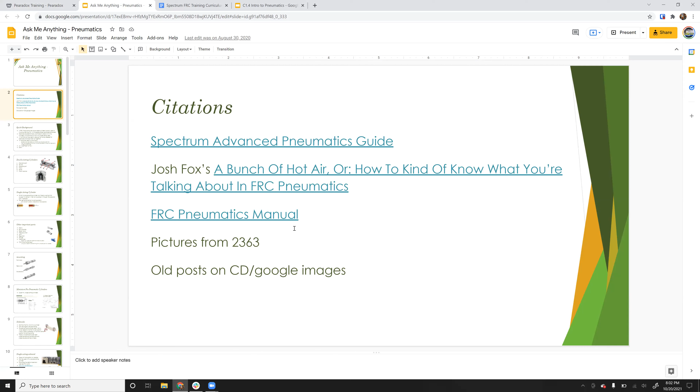This is the Ask Me Anything About Pneumatics from our training guide, our training page on our website. There's some links to some other things in here that might be useful if you want to dive into it a little bit more.

I want to make sure everybody has an idea of what pneumatics are. In FIRST Robotics, pneumatics are air-powered cylinders, typically used to move something into one of two possible states. We'll refer to the pneumatic system as being extended or retracted, typically. There are solenoids that are electronically controlled to direct the air cylinders. The cylinder is the thing people will refer to as a piston, but it's really a cylinder with a rod. It's not really a piston.

The solenoids are used to control the airflow within the cylinders. There's a thing called a manifold that hopefully I'll have a picture of later I can point out. A manifold is a piece of hardware that can reduce the amount of tubing needed to go between solenoids and all of that.

Air tanks are used to hold the air. There's two different pressures to be aware of for air tanks: stored air that can be stored at 120 pounds per square inch, or 120 PSI, and a working pressure amount, which is 60 PSI or less. So when we get into the down and dirty of designing something, we might want some cylinders at the working pressure of 60, and we definitely want to have some tanks at 120 PSI, because we can hold more air if we have it at 120 PSI, but we want to make sure the air is quickly available for some of these things.

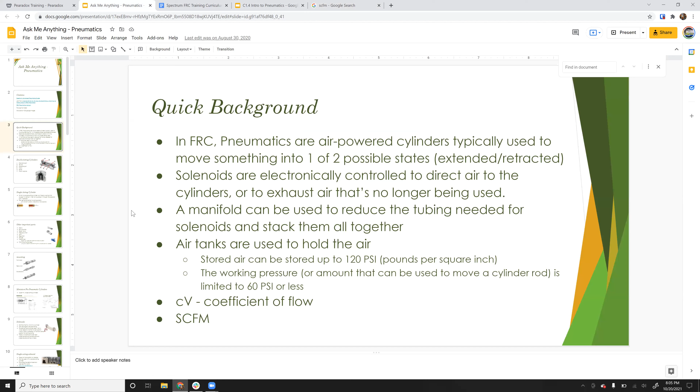I'm sorry, I should have had some pictures here and I just don't with that slide. But these are the cylinders with a cutaway so you can see internally what's going on. You don't need to necessarily worry about all the details right now. If you want to come back and look at this, these are the different parts of a cylinder. In particular, these are called double acting cylinders.

You can tell that they're double acting because there's a port at A and a port at C. So basically you have tubing going into both sides of it, and you have air pressure either to extend the cylinder or retract the cylinder. When air comes in at port A, it pushes the rod out. When air comes in at port C, it pushes the rod back into its retracted state.

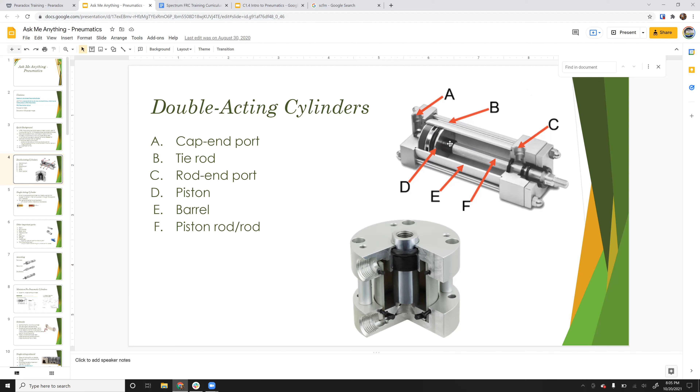Versus a single acting cylinder, you only have one port, and the air is used typically to push it out. Then there's a spring that causes it to return. So when that air is allowed to exhaust out of the system, the spring pushes the rod back rather than having the force of air from another tube come back. So you can either get it to do a spring retract or a spring extend, but typically the spring retract is cheaper and more accessible.

Any questions so far? Is that too in depth? Does that kind of make sense? Makes sense. Okay.

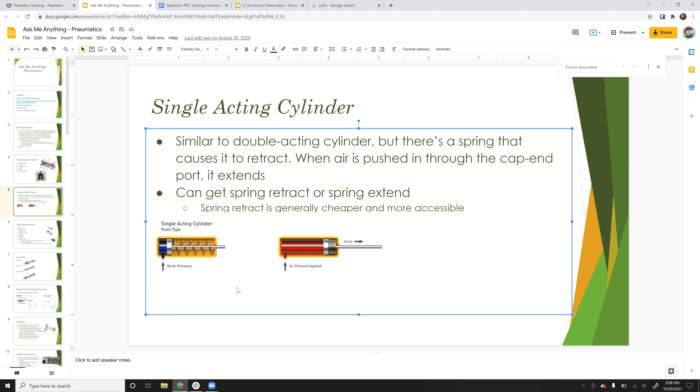So there's a bunch of other important parts when talking about pneumatics. I'm going to skip over a lot of these right now, but they're just different things you can attach to the rod to allow you to connect it into the system.

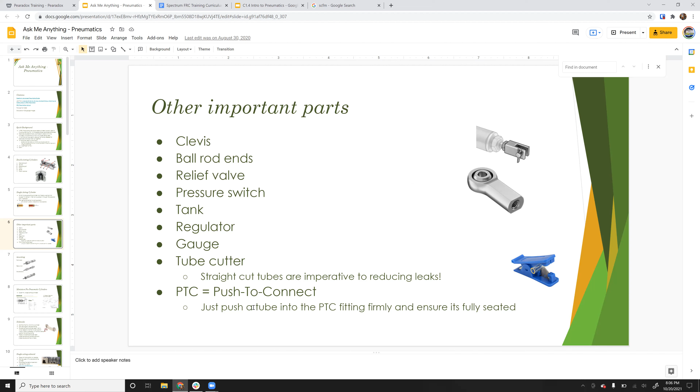This tube cutter is important because you want to get straight cuts. If you have an angled cut, you can end up getting leaks. This PTC is a push to connect - basically you take your tube and push it into the connector and it gets fully seated that way.

There's a lot of different ways to mount cylinders. We won't talk about it too long, but basically you can mount it on the front, using a nut that mounts it to the front. You can have a pivot in the back, where there's a rod sticking up in the middle that goes through something, so the whole thing can pivot around this axle. Or a double end, where maybe you've got both sides supported, or either side supported.

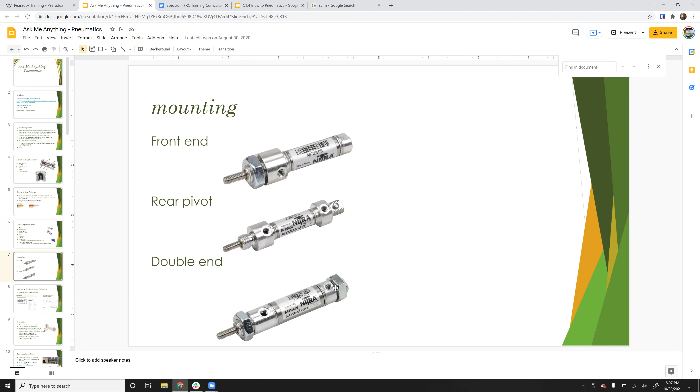There's also very tiny pneumatics, and we haven't really had a need for those yet, but it is something to be aware of. This is an important part of it - the solenoids.

Solenoids control the airflow. Like I mentioned before, they're electronically controlled. We have wires that go to the solenoid, and the solenoid has an output here. The wire comes into this part, and internally there are valves that open and close to direct airflow either to the manifold below it or to some ports in it. Let's see if I have a picture coming up soon of what's happening internally there.

I want to make sure everybody understands, so like I mentioned before, there's single acting and double acting solenoids or cylinders. There's also single acting and double acting solenoids, but the two are not related. You don't have to use a double acting solenoid with a double acting cylinder, or a single acting solenoid with a single acting cylinder. We can get into that more later, but that's really important to know.

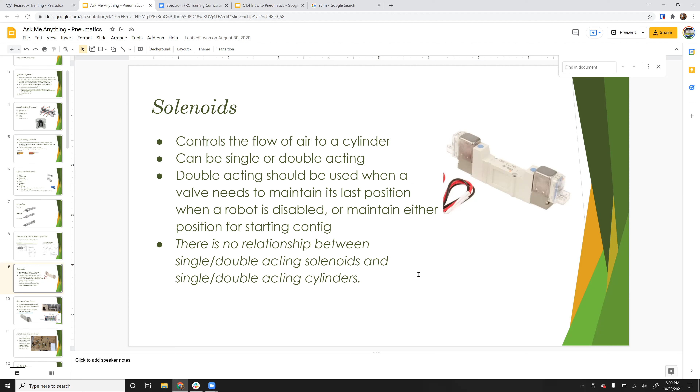Really, we typically should use single acting solenoids unless there's a reason we need the robot disabled in both the extended or retracted state. Basically, with a single acting solenoid, whenever the robot is disabled, all the cylinders go into a default state. We can talk about the design aspect of that more, but it's important to note they are not directly related - you don't have to use the same type for both.

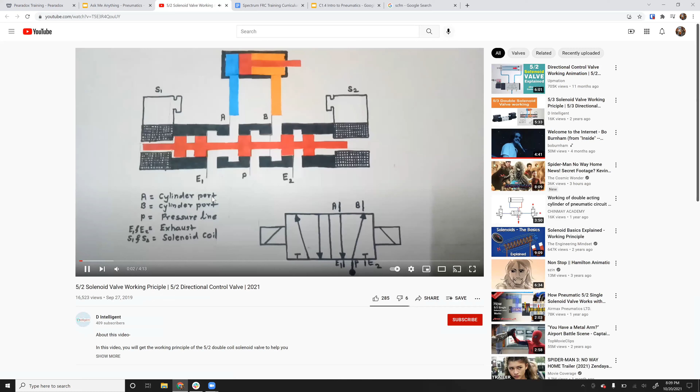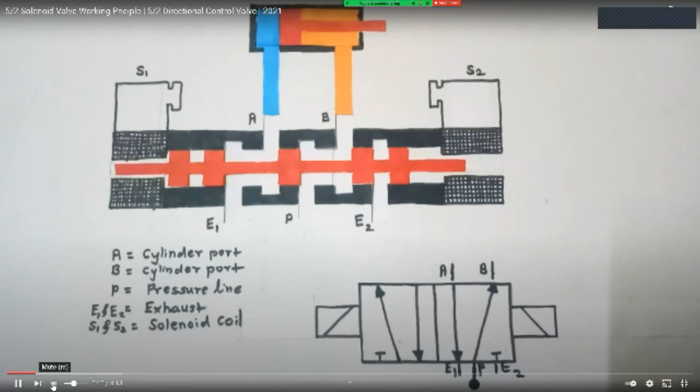Let's see if this video shows internally what's happening with the electronics. Let me make sure I'm optimized for the video clip. We don't have to listen to anything he's really saying right now, I just want us to be able to watch.

So basically you can see internally here, this is called a 5-2 solenoid. This A and B port go to the cylinder, and then there's this exhaust pressure line - so this is the air coming in and then another exhaust.

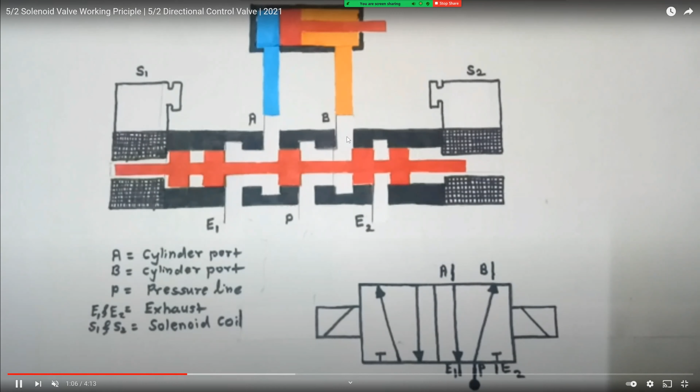Let's speed this up a little bit. So you can see right now, there's no path to anything here, or maybe - I don't know, let's watch this.

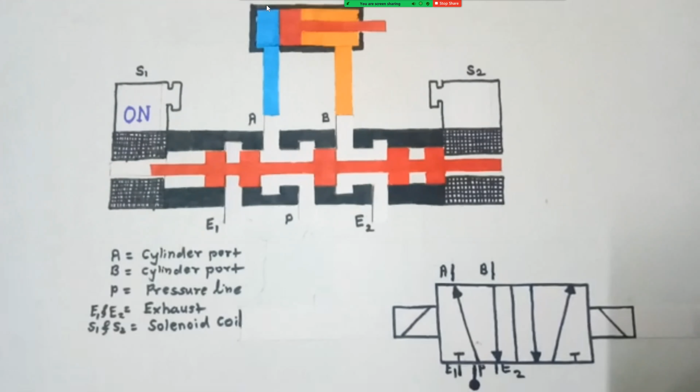So then when this solenoid turns on, we can now see we end up having this path from the pressure line to A, and so it's going to end up pushing the rod out. We also have this path from B to the exhaust line. So the air goes through A, it extends the rod, and then the air gets exhausted through the exhaust port.

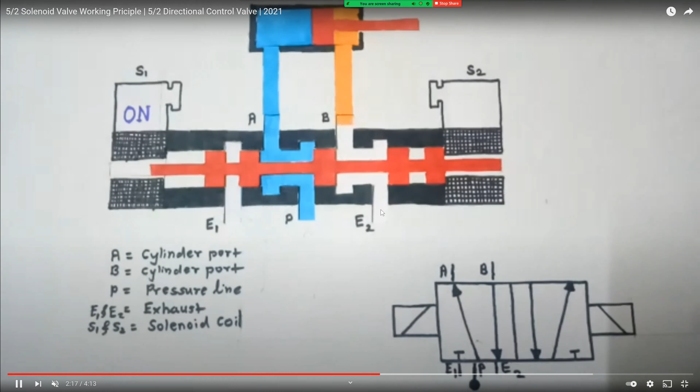And then when the other one turns on, it pushes these valves over the other way.

And now you can see that the B port gets pressurized from the line and the A port can exhaust out.

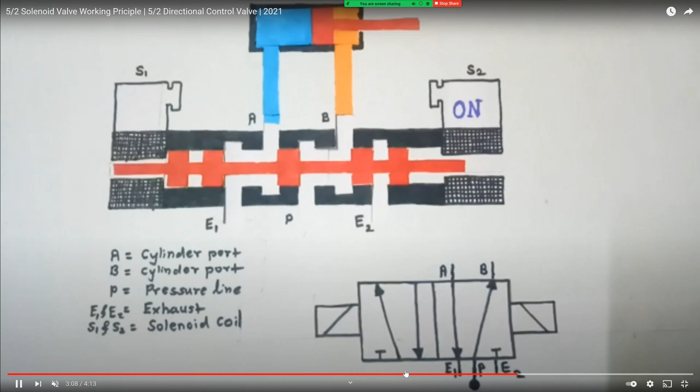I think that was a really useful video for me to watch at one point to kind of learn what was going on. So if you want to go back and watch it on your own at some point and listen to the example, that might be something good to do.

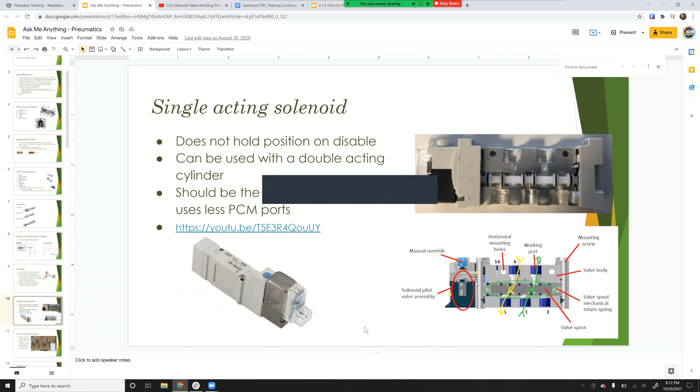Let's stop that. Okay.

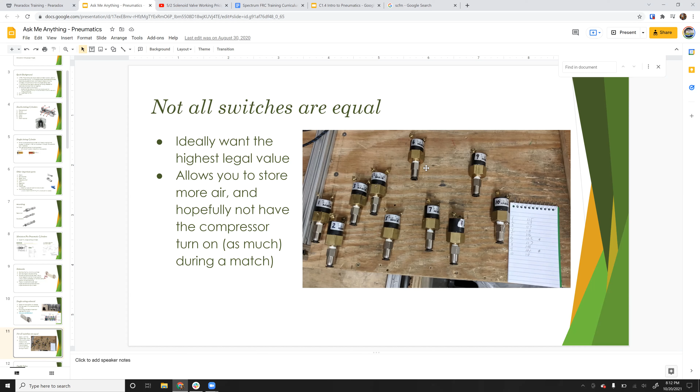There's also a pressure switch. The pressure switch is basically what turns off the compressor once you have 120 PSI stored. They're not all the same, so if we really needed to get picky with it, we might want to test different pressure switches and see when it is that they turn off.

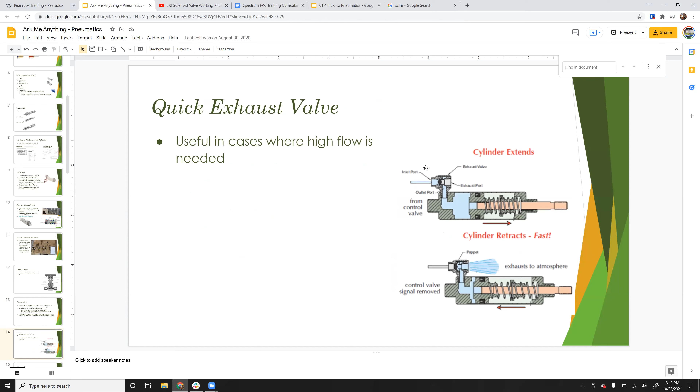We're not going to talk about a needle valve today or flow control today. That's all more advanced stuff.

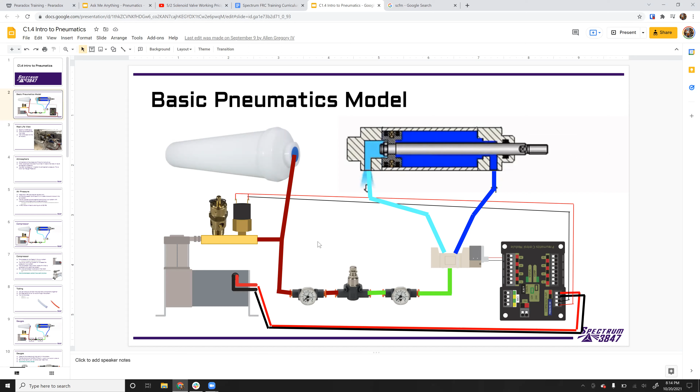This guy here in the middle is the regulator. You can see that on this side, this red tubing would be at 120 PSI, and this green tubing would be at 60 PSI or less. So that's a nice diagram showing what's going on with pneumatics.

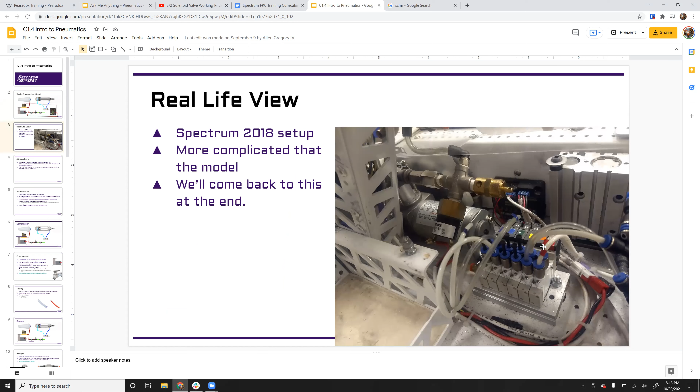Here's some real life pictures of it. You can see this is a manifold underneath. There's a lot of solenoids all stacked together on here, and you can't really see it too well here. But this clear line over here is that 120 PSI coming into the bottom of this manifold. That pressure line is on the bottom, and then the A and B ports of the solenoids are on top, and those would go off to the cylinders.

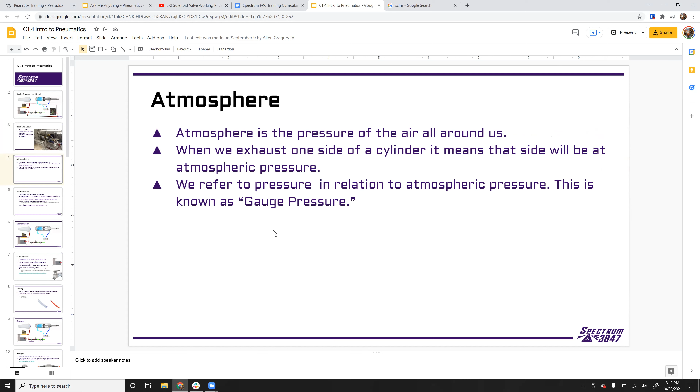We'll talk about this. So 1 atmosphere is the pressure of the air all around us. That's typically at 14.7 PSI if we look at it at an absolute value. When we exhaust one side of the cylinder, it means that that side will be at atmospheric pressure.

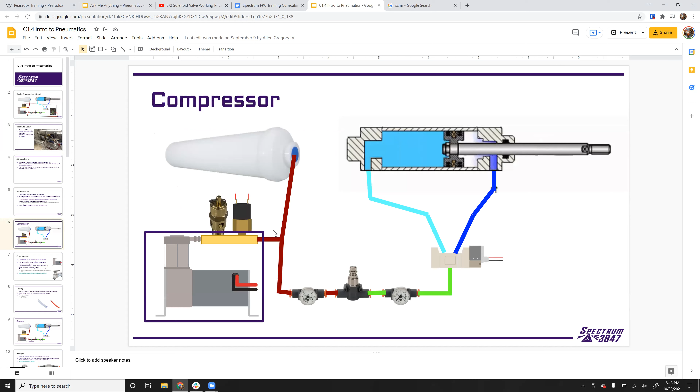Then let's see, we talked about being at 120 PSI, we talked about this stuff. The compressor feeds the air into the system.

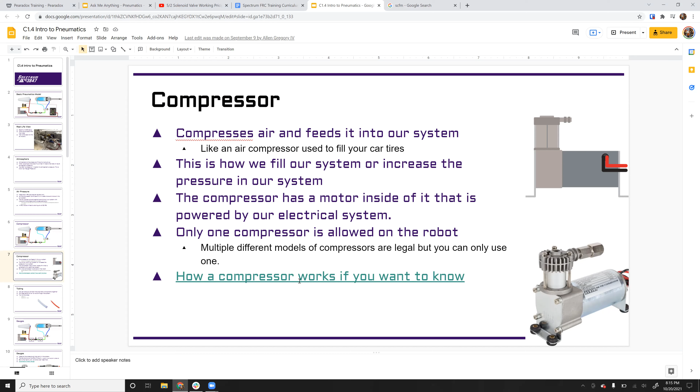There are different types of compressors that we can use, but only one compressor is allowed on the robot. There's a link here if you want to see how the compressor works. We're not going to watch that today.

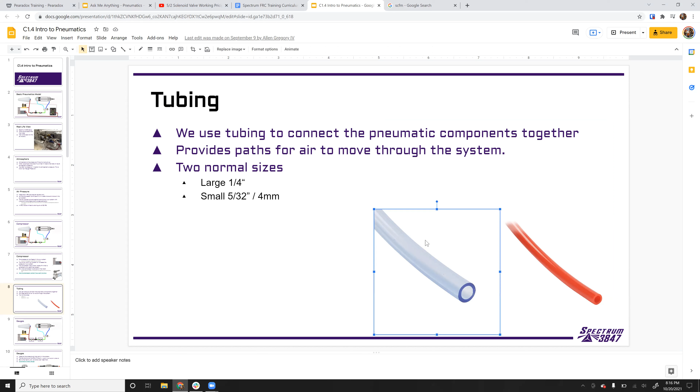Actually, I think maybe that is what we typically use, the 1/4 inch. I think that's what we've got. The 5/32 is a little bit cheaper, but I don't think we've used that.

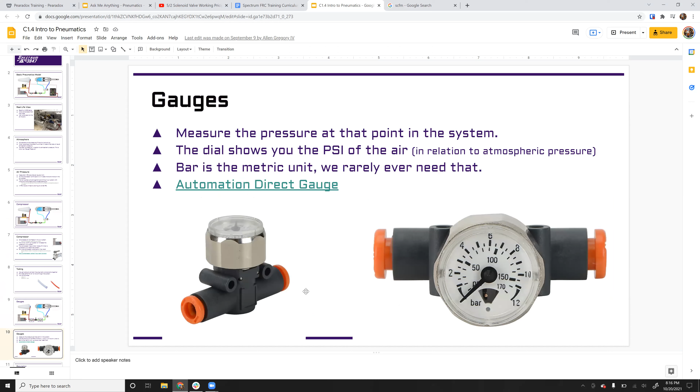We talked about two different gauges here, so that's reading how much air pressure there is. And the regulator, it is important to note that on the regulator, there is a diagram that shows you which way air is flowing.